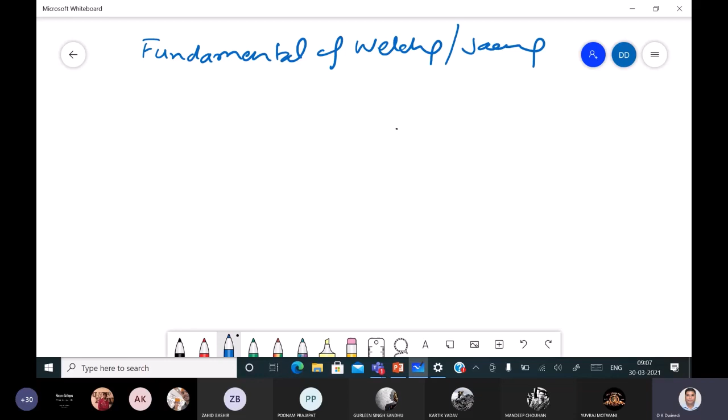Yes sir, okay fine. So what we'll be doing today, we have to primarily talk about the fundamentals of welding, or in general, joining. This can be used for joining of metals or non-metals as well, like plastics or plastic-based composites.

The more interesting or common problems are encountered in joining of metals with non-metals. But very frequently it is required to use both metals and non-metals, and whenever we have to make any usable component, we'll not rely only on one type of metal, but it will be a combination of metal and non-metals.

Due to compatibility issues between metals and non-metals, fusion joining is really difficult. That's why other options of joining are explored.

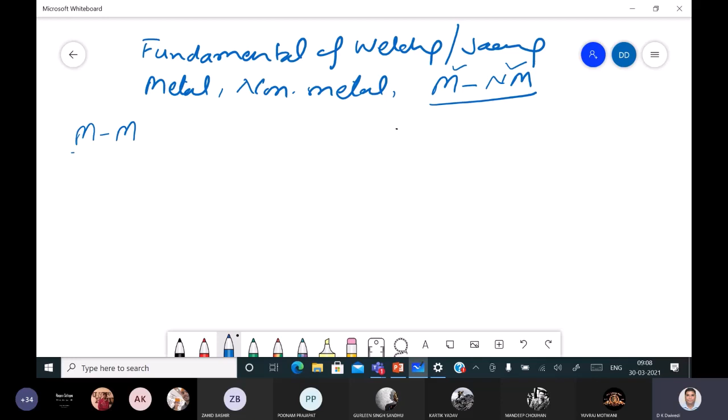So primarily, if we talk of joining metal to metal, what happens? In most conventional cases, if we take two parts made of the same metal A, these can be joined. The best scenario is like the two get joined automatically without doing anything. But this is certainly not workable, because things do not happen automatically. You have to do something.

So the next feasible option is to put some kind of adhesive between the two. In this case, the parent metals A and B are not affected at all and the joint is developed, though the joint is weak. So it may serve some purposes, like just for positioning where no major force is acting.

There is a third, better option. So the first option was not workable. The second is certainly workable, but we get low strength.

Third, better option is where between the two components made of A metal only, we put molten metal of lower strength, like the soldering iron you must have heard of, or the brazing alloy. They have a lower melting point than the parent metal, so that is placed between the components to be joined.

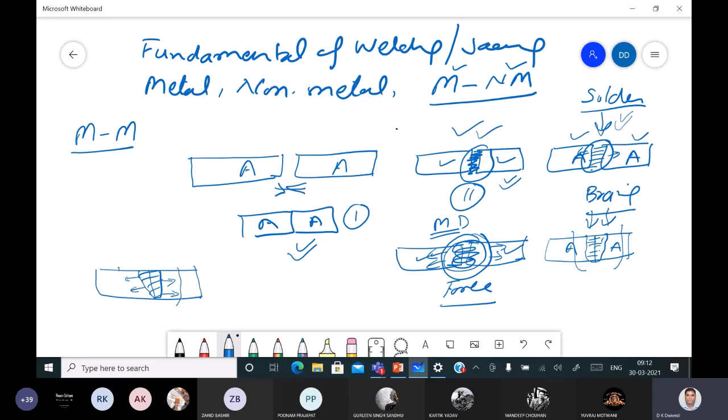So in this process you supply a lot of heat to the underlying thermally conducting base metal. Whenever you supply heat like this and the joint is developed, a lot of heat has been dissipated to the underlying base metal, changing the properties of the material which has been heated, to the zone which has been heated to a high temperature, say above 300 to 400 degrees centigrade for aluminum alloys.

For steel, if it is getting heated above 600 to 700 degrees centigrade, then the properties of the steel will be modified. So basically you are trying to develop the joint through fusion. This is the weld, but next to that the material properties also get modified, forming a zone which will have properties different from the parent material.

Parent material itself, here A and B. I'll give an example. Say A had a yield strength of the base metal of 400 MPa. You may find a situation where the heat affected zone has lost its properties, becoming 300 MPa on both sides. So it will form a weak zone. Similarly, it may become 500 MPa also. So there are both scenarios, both possibilities where you see a change in properties.

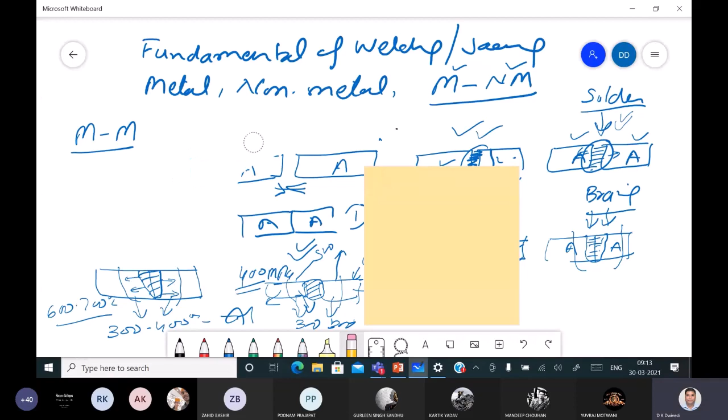And that change may not at all be acceptable. So if that is happening, then what will you do? If the change in base metal properties is taking place, that is by and large unacceptable in case of welding. And if that is the case, then we must do something.

Okay, let's take the base metal. This is the weld joint which has been developed, and this is the zone which has been affected by the heat. So we call it the heat affected zone, HAZ. Both are called heat affected zone.

So this is the weld zone, and next to that we have the heat affected zone where the properties have been modified. These can be modified in very undesirable manners. This can be very strong, this can be very weak. So properties are getting modified, and most of the time this modification is undesirable.

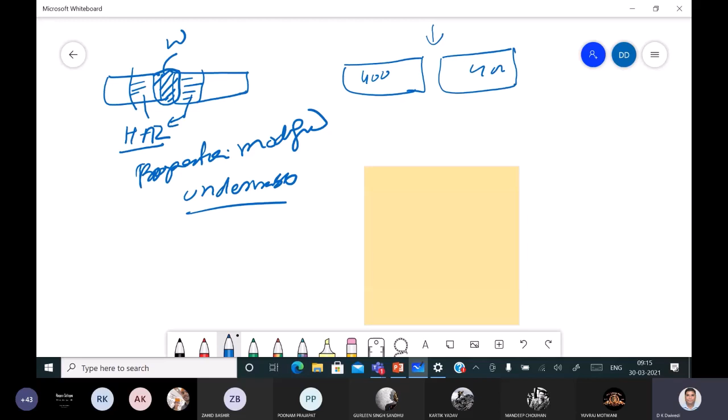So the scenario: the two components to be joined. Here you can use filler of your choice. Base metal had a strength of 400 MPa. You can use filler metal of 300 MPa, or you can use filler metal of 500 MPa. So there is a choice of using a suitable electrode, to get the weld metal of your choice in terms of strength, corrosion resistance, toughness, or whatever properties are needed.

But when you use fusion welding, there is no way to get rid of or avoid this heat affected zone, which experiences changes in properties that are not desirable. So you have good control over the weld, but you don't have any control over the HAZ, because you have already supplied a lot of heat, and due to thermal conductivity, the base metal properties have got modified, and this modification is most of the time undesirable.

So what can we do? We don't have anything in our hand. If you supply less heat, then probably the width of this undesirable zone will get reduced. If you supply very little heat, a very small heat affected zone will be formed on both sides. But this zone will be formed in any case.

So when you supply more heat, there are more problems to the heat affected zone and base metal properties. And when you supply less heat, the problem is less.

So when we supplied minimum heat, when we did nothing, the first case, just bring the two components together. Second case also, there is no application of heat, where we applied just adhesive. In the third case, we supplied little heat in the form of brazing and soldering, where low melting point material was applied. In the fourth case, we applied force for facilitating deformation.

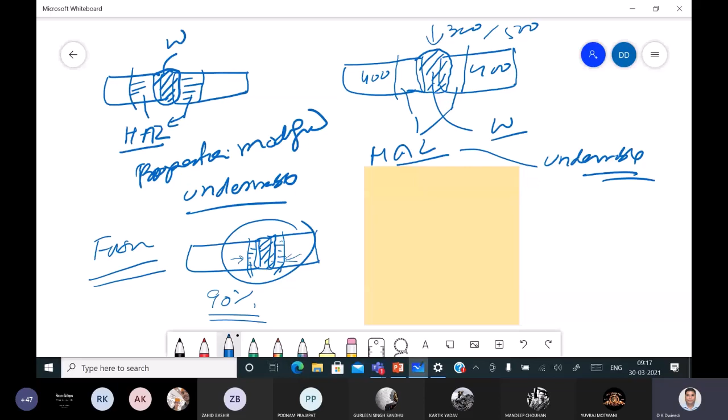More than 90% of welding or joining is performed through fusion welding only. The rest of the joining is really not for structural applications.

So this is that diagram. We get this modified zone on both sides.

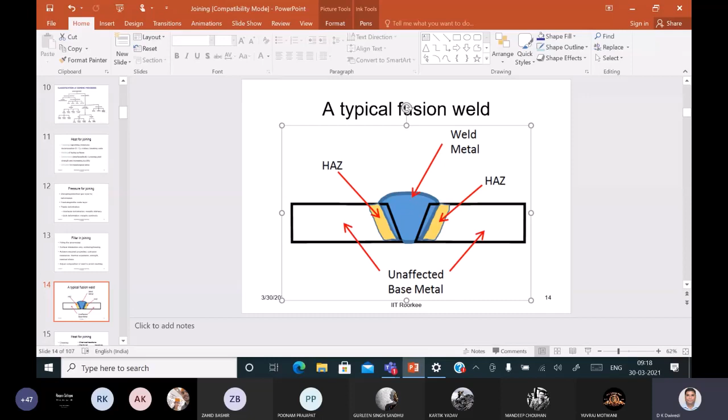Okay, so we get this modified zone on both sides, in the form of the heat affected zone. The weld is of our choice; this we can do as per our convenience. And this is the unaffected zone, the base metal. So the width of this yellow zone can be very wide or it can be very narrow. So what are the things that will be governing the width of this?

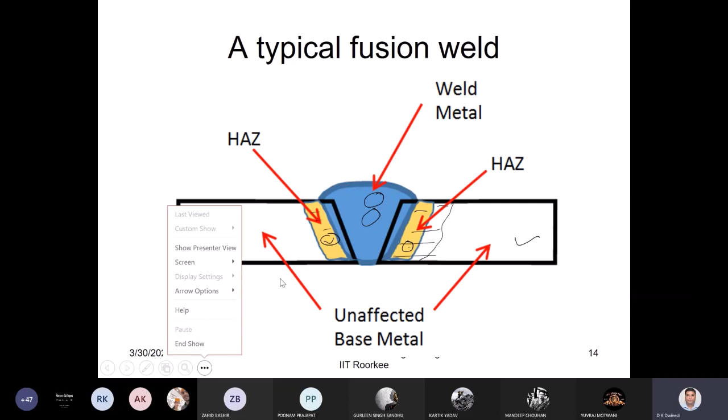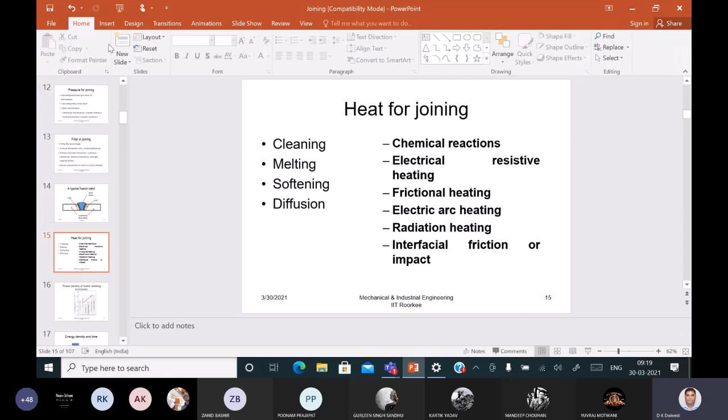So what we can do to control this width of the heat affected zone.

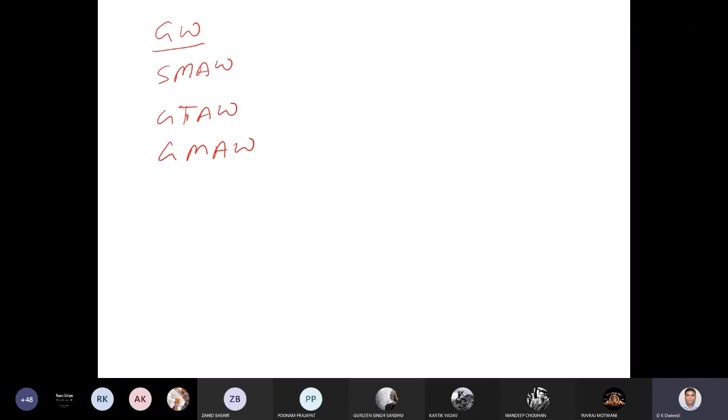Let's see, there are different welding processes, starting with gas welding. Then the very commonly used roadside welding that you see is shielded metal arc welding. The very commonly used for high quality welding is gas tungsten arc welding. Then for industrial applications for high quality weld, gas metal arc welding. Then for very high quality thin sheets, or where very fast and thick sheets are to be welded, there are other processes also, like plasma arc, then laser beam welding, and electron beam welding.

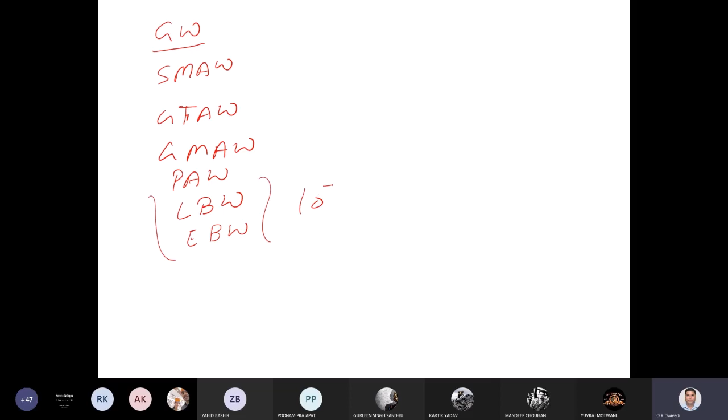If you see the kind of power density they are able to apply, it is 10 to the power 8 watt per mm square, and on the other hand gas welding is just 10 to the power 2, that is 100 watt per mm square, per second. This is the kind of heat it is able to deliver, and the laser beam is able to deliver 10 to the power 8. So these are in increasing order of the power density that they can deliver.

So the higher the power density related to the particular fusion welding process, the lesser the heat you need to supply, because it takes very less time to supply the required amount of heat. Say metal A will require a typical 2 joule per mm cube of heat. Say this is the heat required to bring things to the molten state, which includes both latent and sensible heat. But when you are supplying heat at a low rate, it takes a long time to reach this stage.

But when we use a process where the rate of heat delivery, the power density associated with the process, is very high, in very less time it takes to supply the required heat. And here, at low power density, it takes very long time. Say this is the kind of metal system which is being welded.

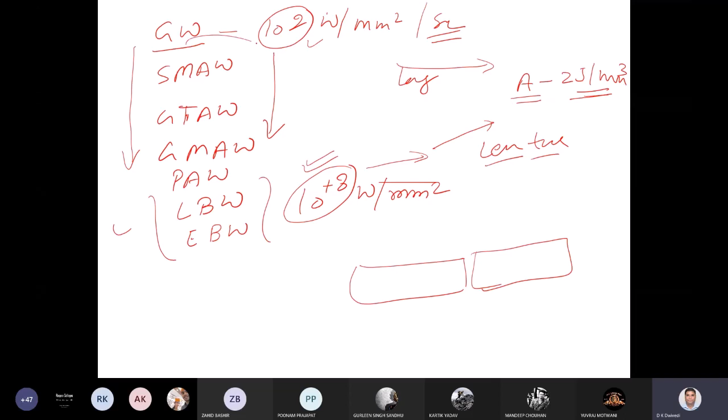So when we use gas welding, it covers a lot of area with the gas flame, and delivers the heat at a very low rate. So you continue to supply heat for 1 minute, 2 minutes just to get the things in molten state. Since the metal is thermal conducting in behavior, it will be dissipating a lot of heat to the underlying base metal, forming a very wide heat affected zone, on both sides.

So the greater the heat affected zone, the greater the compromise with the properties. On the other hand, when we use the laser, in a very short time you are able to deliver a lot of heat, so it comes to the molten state immediately. The heat you need to supply to bring things to the molten state is very less, and heat dissipated to the base metal is also very less. That's why the HAZ is very narrow, or you can say very negligible HAZ is formed. So the compromise with the properties of the base metal is negligible. That is why laser welding or electron beam welding offers a good quality weld compared to gas welding, shielded metal arc welding, or other processes.

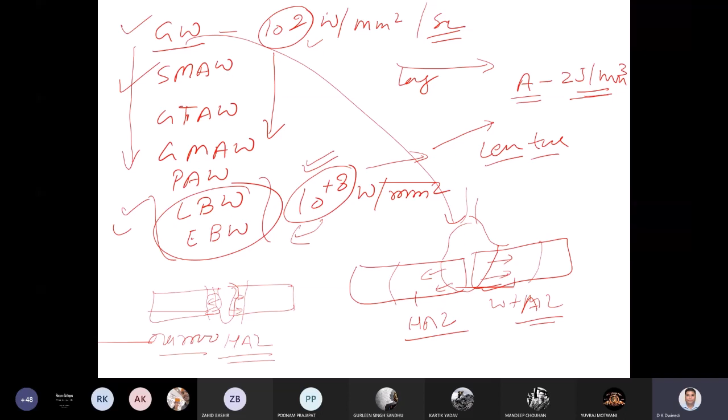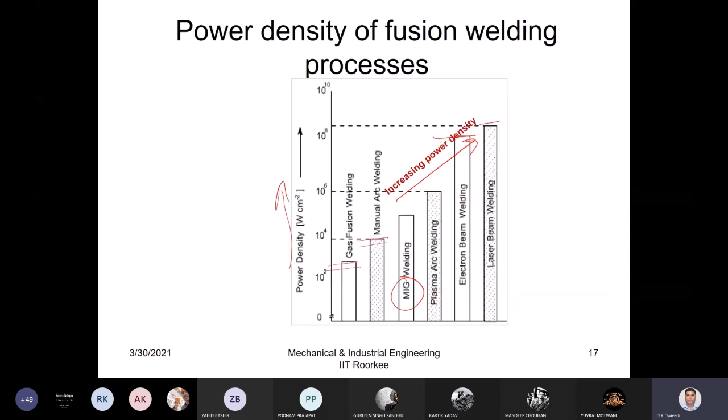So this is what I was saying: the power density associated with different welding processes. Say this is for gas welding, this is for manual metal arc welding or shielded metal arc welding, for GMAW or the MIG process, and this is for plasma. So it is in increasing order. If you see the increasing order of power density, increasing power density means the lesser heat you can supply just to develop the weld of the given metal system. That is what you can see from here.

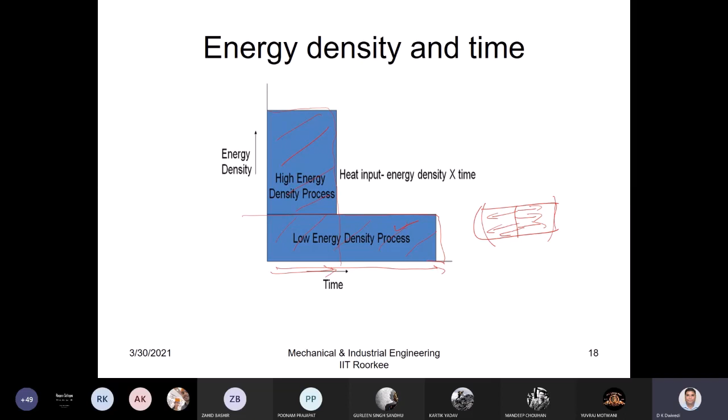On the other hand, when you use the low energy density process to supply the same amount of heat, you need to keep on supplying the heat for a longer time, and in this process the heat will get dissipated to the base metal to a greater distance, forming a large heat affected zone, meaning greater compromise with the properties of the base metal. So low energy density process means greater heat input. You see heat input to the workpiece: gas welding means more heat input to the base metal, so more compromise with the properties, greater damage to the workpiece.

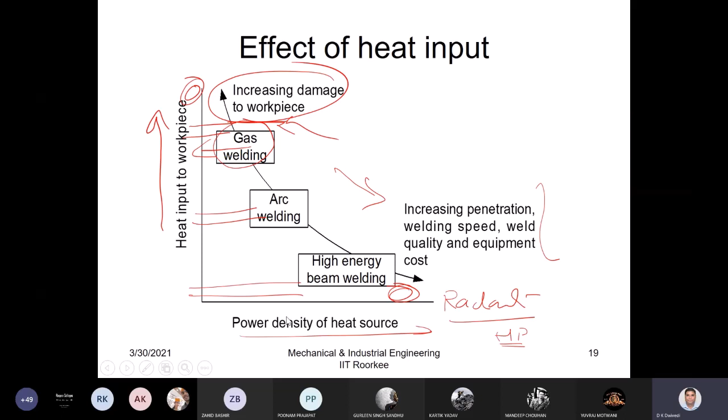On the other hand, when the power density related to the process is very high, like laser beam or electron beam, other abilities are fine, but the thermal damage is less. Increasing thermal damage this side and decreasing thermal damage on this side. So radiation based welding processes like laser and electron beam are high power density processes. Gas welding or arc welding are comparatively low power density welding processes, so they have to supply a lot of heat. For gas welding it's maximum, medium for arc welding, and minimum for laser or electron beam welding. So if you are able to weld with less heat, it's best, because it will not lead to any compromise with the properties. So these are other technological factors, like how heat affects the performance of the weld.

Heat affects the performance of weld primarily in the following ways. Before getting into this, let me use a little explanation.

Say you have supplied a lot of heat, so your weld zone size is very large, and the underlying base metal has also been heated. So heat from the molten metal will be dissipated slowly, meaning the solidification time of the weld metal will be very long, maybe say 1 minute. So every grain will be growing to a larger extent because of the long solidification time. And when your grains are coarse or very large, your mechanical properties are compromised very badly. So this is not good.

On the other hand, when you supply very little heat, the weld zone size is very narrow, very small, and heat is dissipated to the underlying base metal, which is at low temperature, very fast. So the solidification time is less. Less solidification time means cooling rate is very high. That's why you get low solidification time, and that's why the grains are fine. When the grains are fine, the properties are good. So this is a simple relation.

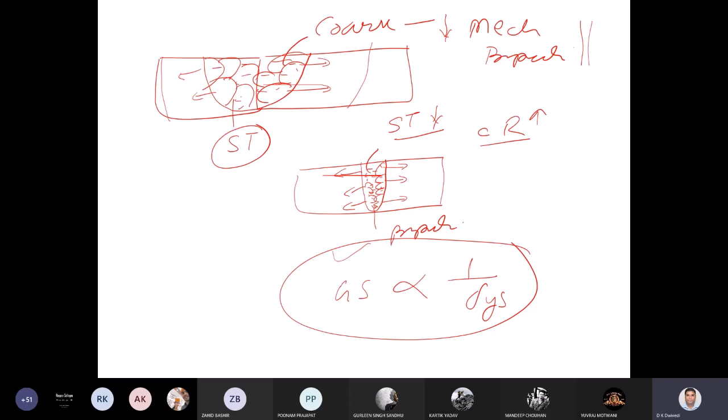The grain size is inversely related to the mechanical properties, primarily the yield strength. So larger the grain size, lower the mechanical properties, lower the yield strength. Finer the grain size, better the yield strength. Yield strength is simple - you must have studied this in the stress-strain diagram. It is the stress level which is desired for ensuring the plastic deformation of the material. Below that, it will be under the elastic deformation condition.

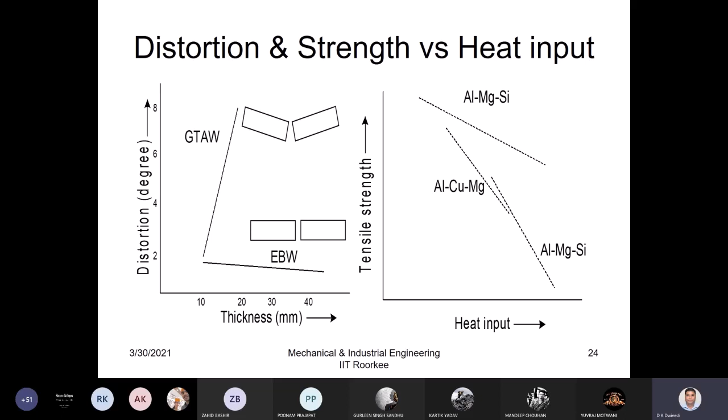So I have already talked about this. There is another aspect. Let me just come out of this PPT kind of thing. Here's another important aspect, apart from the heat affected zone - a very important aspect.

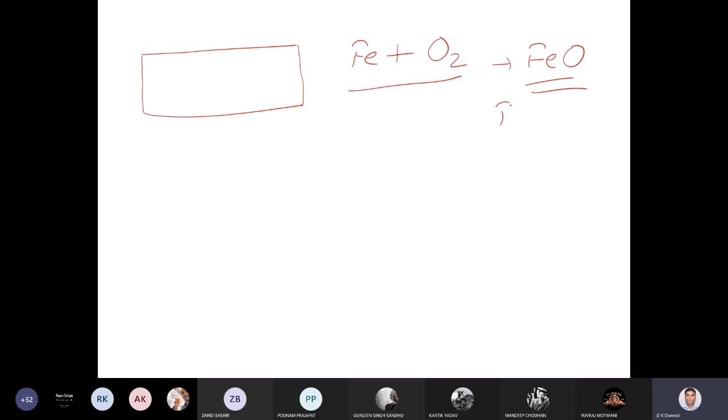When you heat any metal - you must have heard that iron, even in ambient conditions, in the presence of moisture, reacts with oxygen and forms iron oxide. Different types of iron oxides are formed, which appear in the form of rust. This process is slow - it takes long for iron to rust.

But when iron is heated to a high temperature, oxygen reacts very rapidly. If you heat it to 300 degrees centigrade, then 600 degrees centigrade, 900 degrees centigrade, you will see that iron has taken different colors, primarily due to the formation of different types of oxides. In case of iron, these oxides are fine - the iron oxides are not as harmful as others, because all these iron oxides have a melting point lower than the iron itself.

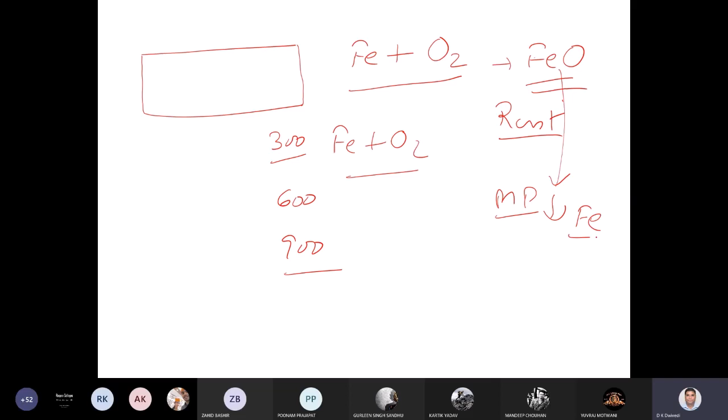Say this is iron, and whatever iron oxides are present at the surface - when you heat it, the iron is heated up to say 1540 degrees centigrade, that's the melting point. So FeO, all types of iron oxides, will melt earlier before that. So iron oxides melt earlier than the parent metal, iron itself. So it's not that problematic, except there is one problem - iron oxide may mix up with the molten metal, so iron oxide particles may be present here and there in the weld. So this is one thing.

Iron oxides are present in the molten metal, in the weld metal, as defects. These are called inclusions. Inclusions are formed primarily due to the reaction of the molten metal with atmospheric gases, such as oxygen leading to iron oxide formation, or nitrogen reacting with the hot metal to form iron nitrides. Both are harmful for the mechanical properties.

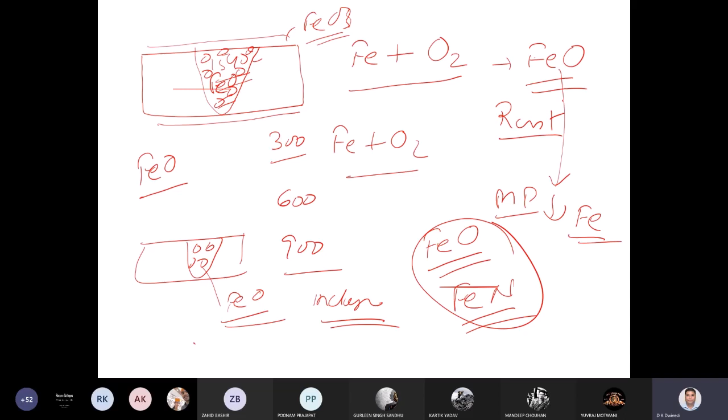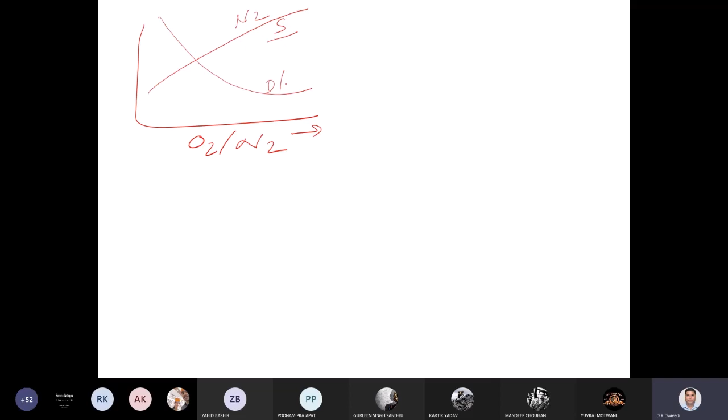If you see the general trend with nitrogen content in the weld metal, the strength increases, but the ductility and toughness come down. So strength goes up while ductility and toughness both come down heavily with nitrogen.

On the other hand, with oxygen content in the weld metal, all properties are affected negatively: strength comes down, ductility comes down, toughness comes down. So everything deteriorates with increased oxygen in the weld metal. Mechanical properties are badly compromised because oxygen and nitrogen in the weld metal form oxides and nitrides, which act as defects, badly compromising the joint properties.

Therefore it is important to understand that the activity of these metals to react with oxygen, nitrogen and hydrogen all increases with increasing temperature. The affinity of the metal to react with other gases simply increases with temperature. Here, we are increasing the temperature of the metal to the molten state, which in case of iron is about 1540 degrees centigrade.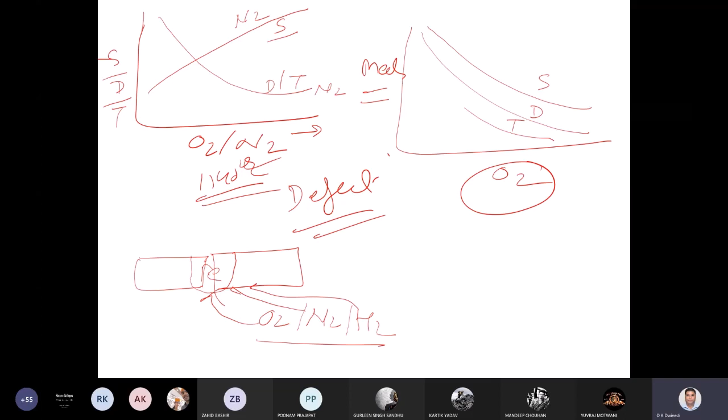When iron is heated to the molten state, it becomes very reactive and shows a strong affinity towards these gases. So whenever iron is in the molten state, it reacts with oxygen, nitrogen, hydrogen, etc., and these gases get dissolved into it.

When these gases get dissolved, it's fine if they remain in gaseous form, leaving gas pockets in the weld that reflect as pores. Oxygen and hydrogen contribute a lot to forming these pores, which leads to loss of metallic continuity and the presence of defects in the form of pores.

This happens because these gases have affinity and get dissolved easily in the molten state, and due to the high solidification rate during welding, they are not able to come out of the molten metal. They get trapped, and when trapped, you find them in the form of pores. So not just the chemical reactions leading to oxides and nitrides, but also gas entrapment leads to the development of pores.

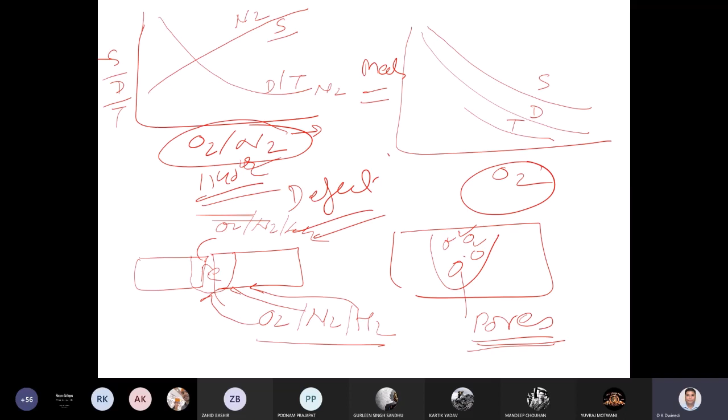These pores and inclusions are harmful for the joint strength and joint properties. So the weld must be protected from these gases, which is why we call it protection of the weld from atmospheric gases during welding.

This is why we need to protect the weld, because oxygen, nitrogen and hydrogen present in the ambient air react with the molten or hot metal, leading to discoloration, porosity formation, and inclusion formation. All of these are undesirable. So what can we do to protect it?

Consider this electrode, simply coated with certain fluxes. When this electrode is coated with fluxes and an arc is struck between it and the base metal, connected through a suitable electrode to the power supply, the circuit is completed. The power supply is connected to the electrode, and another terminal is connected to the base metal to be joined.

So current flows from the electrode to the base metal, and that's how the arc is generated. The temperature of the arc is typically a minimum of 6000 degrees centigrade. It can go as high as 25,000 to 30,000 degrees in the case of plasma arc welding, abbreviated as PA. So the temperature is very high, and any metal can basically be brought to the molten state when such high heat is supplied by the arc to the base metal.

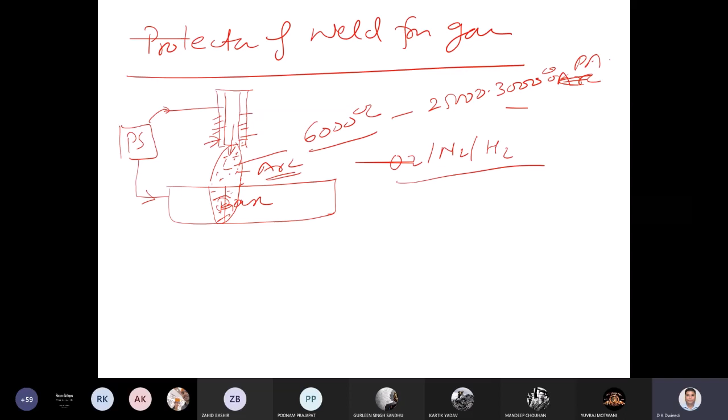So how does the protection come here? The flux which is there with the electrode decomposes with the heat of the arc. So the heat of the arc decomposes the flux with the electrode, and when this decomposition takes place, it forms carbon dioxide, CO2.

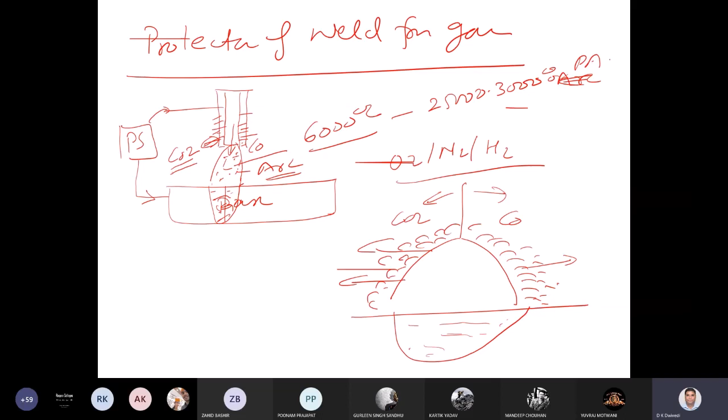So say this is the arc, this is the pool, and the decomposition is taking place, leading to CO2 or CO formation, which forms a blanket or shroud around the arc or the molten weld pool. It pushes the oxygen, nitrogen and atmospheric gases away from the arc zone, forming a cover around the arc and the molten zone. That's how oxygen, nitrogen and hydrogen present in the atmospheric gases are pushed away through this thermal decomposition of the electrode coating, which is mostly in the form of fluxes applied to the electrode to protect the weld pool from atmospheric gases.

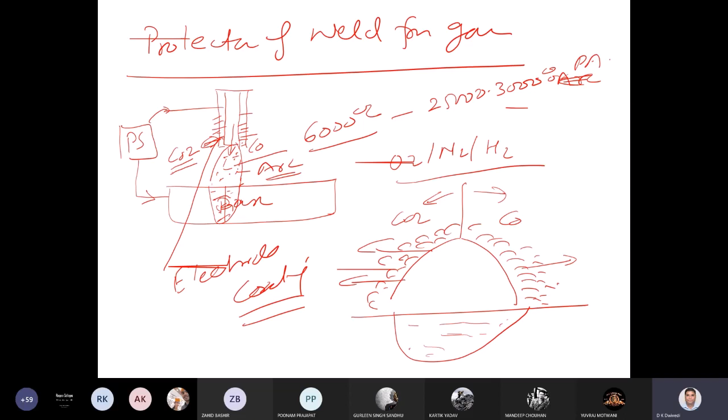This is one way. There is another way to protect the weld pool from atmospheric gases, and that is - around the electrode we have one nozzle. This is the electrode, and this is the nozzle. Through this nozzle we supply inert gases like argon or helium.

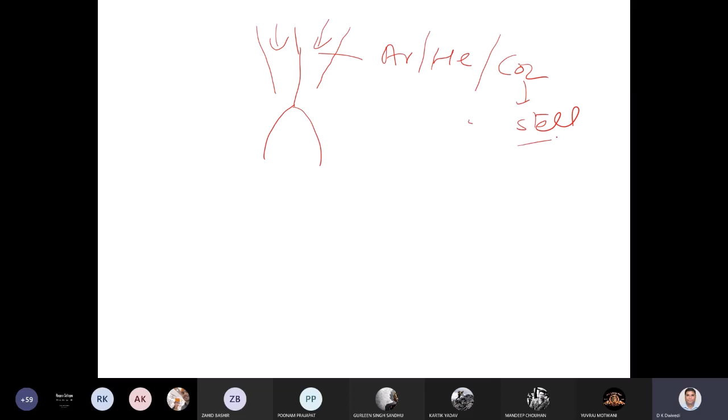We can also supply gases like CO2, inactive gases. This is primarily used for ferrous metals like steels, and inert gases are primarily used for non-ferrous metals or where high quality weld joints need to be prepared, like for steels, aluminium, magnesium, and stainless steel, because they show greater affinity. I'll talk about why inert gases are particularly needed for this.

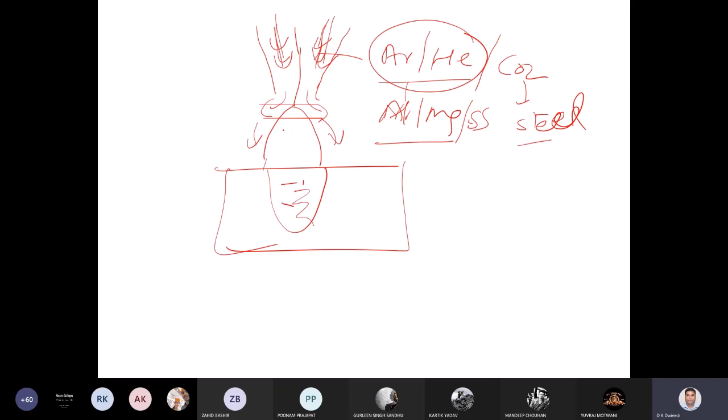So we supply these inert or inactive gases in the form of a jet through the nozzle. When these gases come out of the nozzle, they form a very firm and strong jet around the arc. So this is the pool, this is the arc, and around the arc it forms a very firm shroud of inert gases. Use of inert or inactive gases like CO2, depending upon the metal, helps push atmospheric gases away from the arc zone and the molten metal, and that's how it protects.

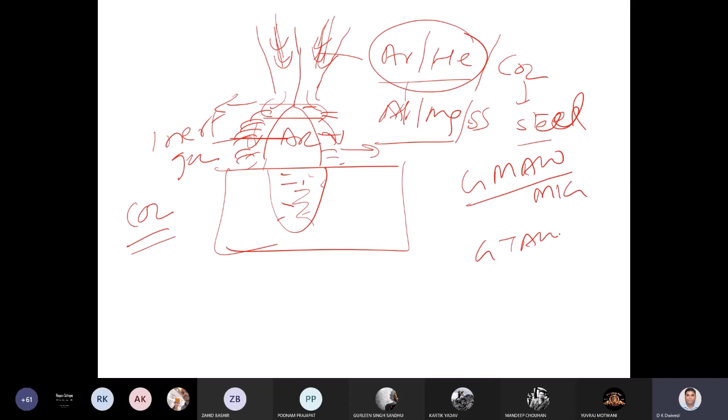This is the second approach. In one case we use electrode coatings; in the second case we supply a jet of inert gases around the arc. This approach is primarily used in gas metal arc welding, also called MIG, and gas tungsten arc welding, also called TIG - tungsten inert gas welding or gas tungsten arc welding process. In both these cases, this inert gas approach is used.

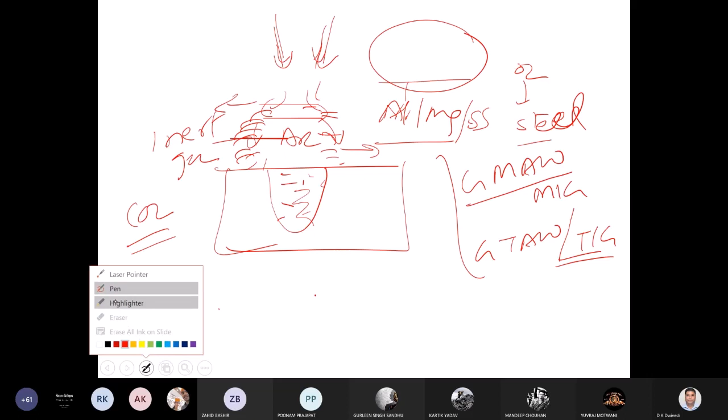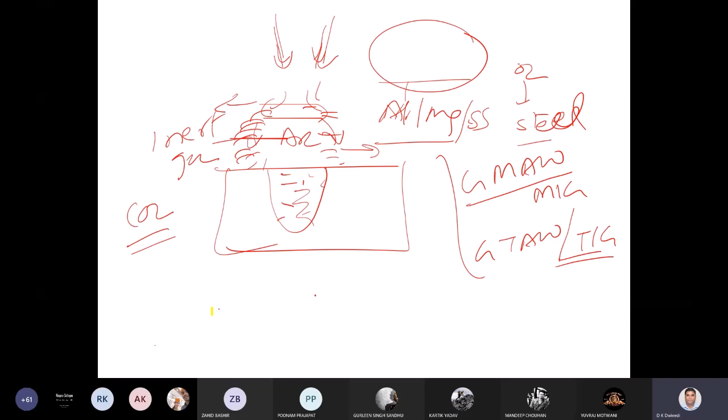There is a third approach of protecting the weld metal, a simpler one. Here, what we do is... let me just end the show and come out with a new one. In that case, we use vacuum.

Vacuum is primarily used because, whether it is laser welding - which is also performed with the help of inert gases like argon or helium - these approaches of protecting the weld pool are not good for the electron beam. Why? I'll let you know.

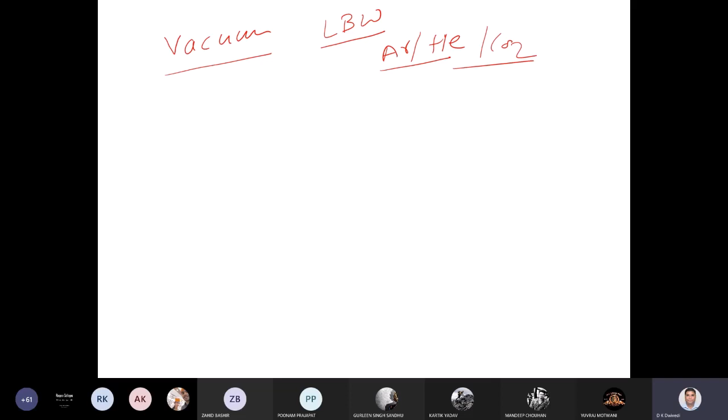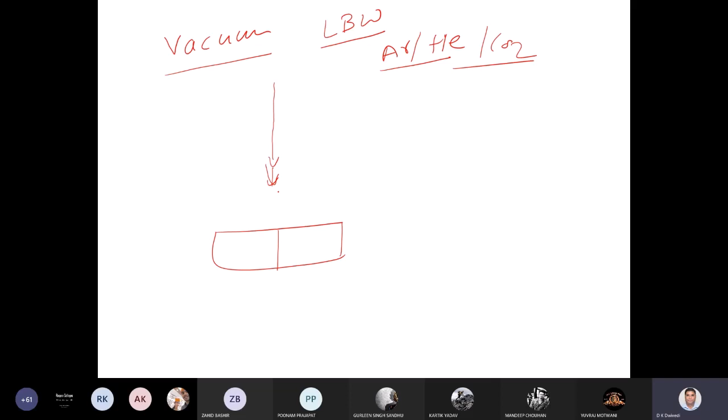In electron beam welding, a jet of electrons is used that strikes the base metal to be joined. If the beam of electrons is directed in the ambient atmosphere, the electrons will collide with the atmospheric gases and their kinetic energy will be reduced, so they will not be able to generate enough heat. Despite providing protection, it will not be able to weld properly.

So what we do basically is enclose the entire assembly to be joined in a vacuum chamber. The components to be joined are placed in the vacuum chamber. Once placed, there is no oxygen and no nitrogen, because all air has been sucked out of the vacuum chamber. Now you direct the electron beam.

So the air has been removed from this vacuum chamber, and the electron beam is directed onto the base metal for melting. Because of the high power density, it melts and produces a very high quality joint, since heat delivery is very low for facilitating the fusion, and vacuum is created so there is no presence of oxygen or nitrogen to dilute or degrade the quality of the weld. This is the third approach of protecting the weld pool.

So you have seen now that weld performance is governed by two things.

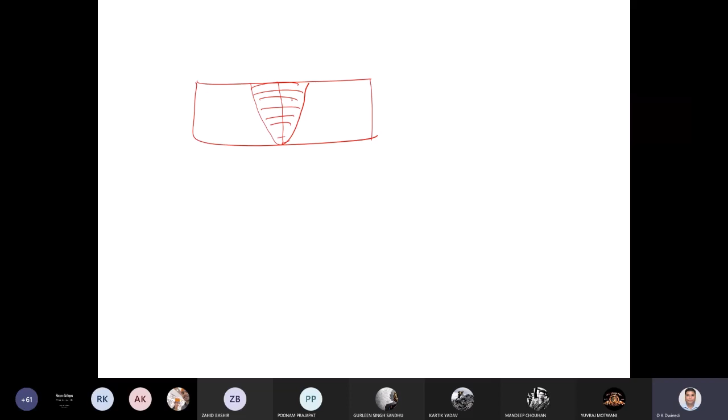One is the soundness of the weld. Soundness means how defective the weld is—if there are oxides, if there are pores. If oxides and pores are present, it means the joint is not clean and has defects. If the weld is properly protected, it will be sound and will not have defects like oxides and pores.

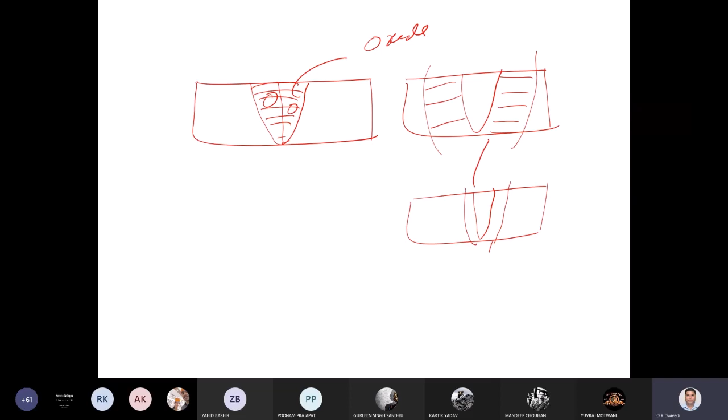The second aspect that governs the performance of the weld joint is the heat affected zone—the size of the HAZ and the extent to which its properties are compromised due to the application of heat. Processes where heat application is low produce a narrow HAZ, and joint performance is much better compared to cases where a lot of heat is supplied and a wide heat affected zone is formed. The wider the heat affected zone, the greater the compromise in properties.

So these are the two main things governing the performance of any joint: reduce the heat input to reduce the HAZ, and protect the weld pool to avoid the undesirable effects of atmospheric gases.

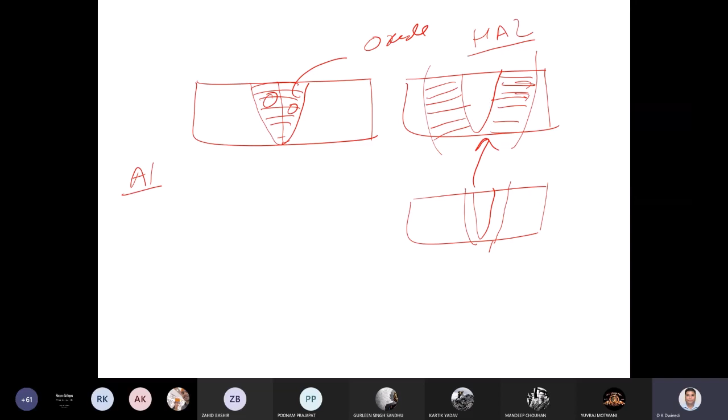Now I'll talk a bit more about why certain metals are more difficult to weld than others. Aluminium is not easy to weld by gas welding—it's not welded that way. Same is true for shielded metal arc welding, where a simple stick electrode with a core wire coated with flux provides shielding through an arc. This approach is also not good for welding aluminium. Same is true for titanium and magnesium—these are not welded easily.

Hello? Saying something?

So why is it more difficult to weld certain metals compared to others, and why do they need more protection? The reason is simple. All these metals, including chromium, which is added significantly in stainless steels, are found difficult to weld. Why? Because whatever oxides they form—like Al2O3, TiO2, MgO, or chromium oxide Cr2O3—all these oxides have melting points much higher than the parent metal itself. For example, aluminium melts at 660, but alumina may melt around 2100.

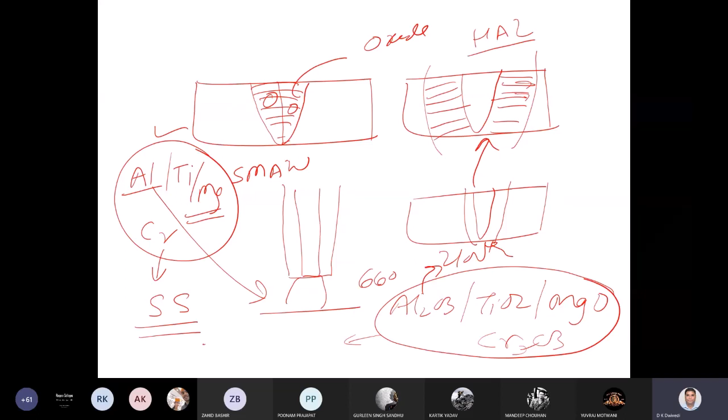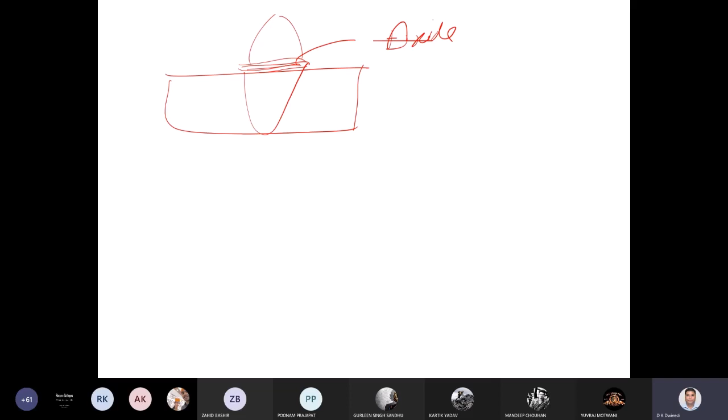Once the oxide is formed, it will not allow the base metal to melt easily. So as you heat the base metal through the arc, alumina or titanium oxide or chromium oxide is being formed, creating a refractory oxide layer that does not melt easily. It will interfere with the melting of the base metal, and since it doesn't melt, it will remain as oxide inclusions.

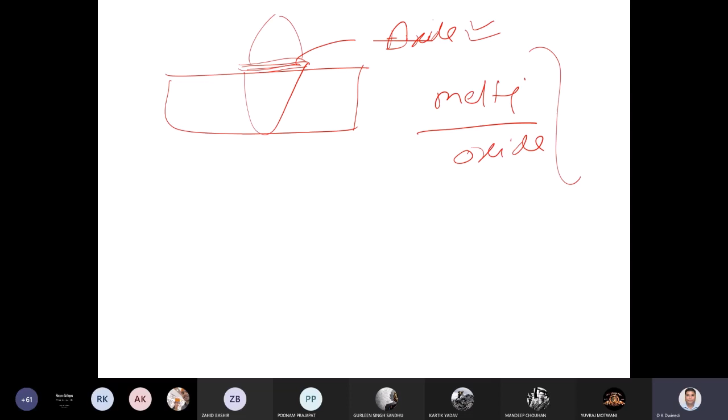So the formation of certain oxides with metals like aluminium, magnesium, chromium (stainless steels), and titanium means they need more effective protection. That is why they are frequently welded with good protection-based welding processes like GTAW (gas tungsten arc welding) or GMAW (gas metal arc welding), rather than shielded metal arc welding, submerged arc welding, or gas welding. This is the main reason: these two processes use argon or helium, which provide very good protection so that these refractory oxides are not formed.

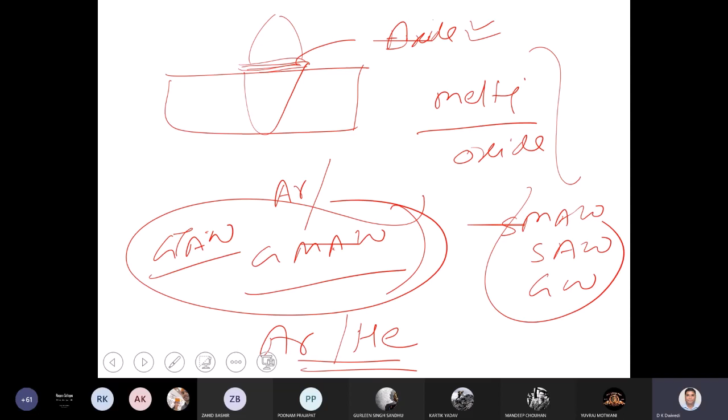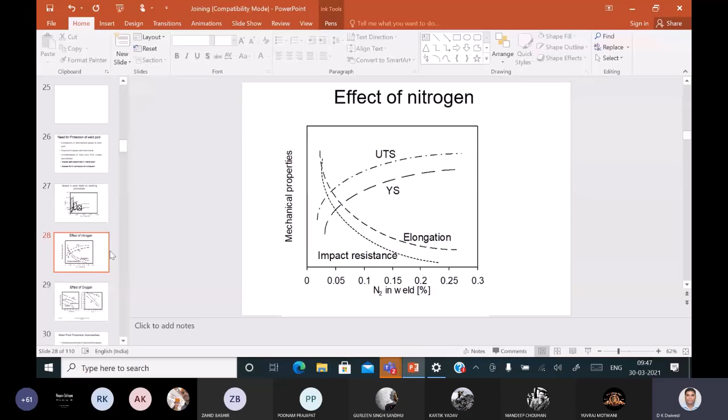This covers the main fundamentals as far as welding is concerned. Once you understand this, the rest of the things will probably be easier for you to get. Now let me talk just about this.

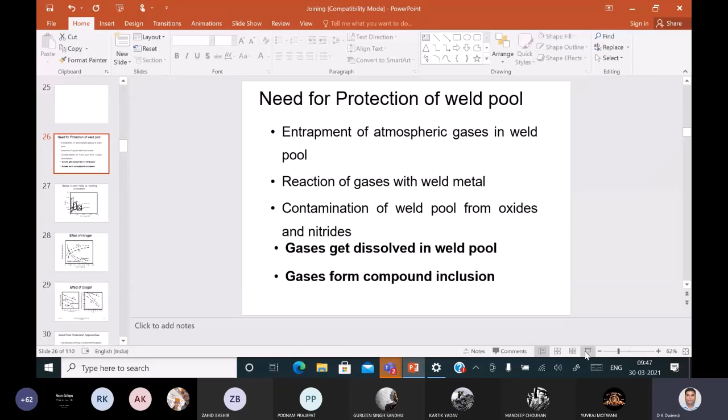As I said, if the protection is not good, what harm can it do? Protection is needed for the weld pool so that entrapment of gases in the weld can be avoided. The gases react with the weld metal, so inclusions can be avoided by preventing the formation of their oxides. Contamination of the weld pool from oxides and nitrides—as I've already said, these gases dissolve and will be present in the form of pores, or they can react to form inclusions like oxides and nitrides.

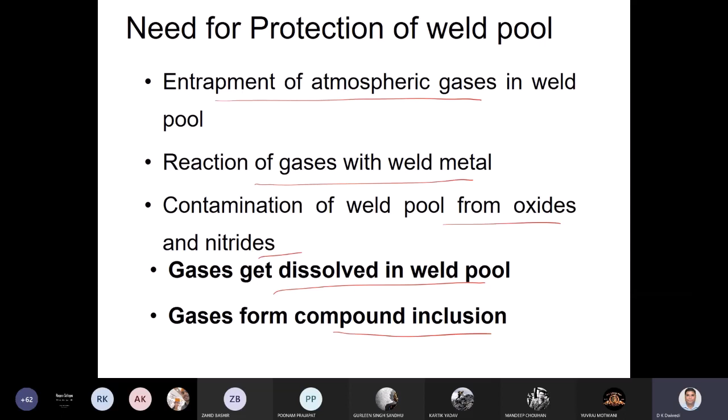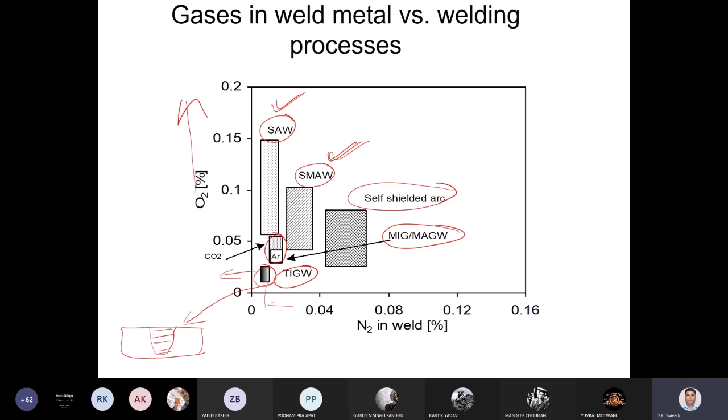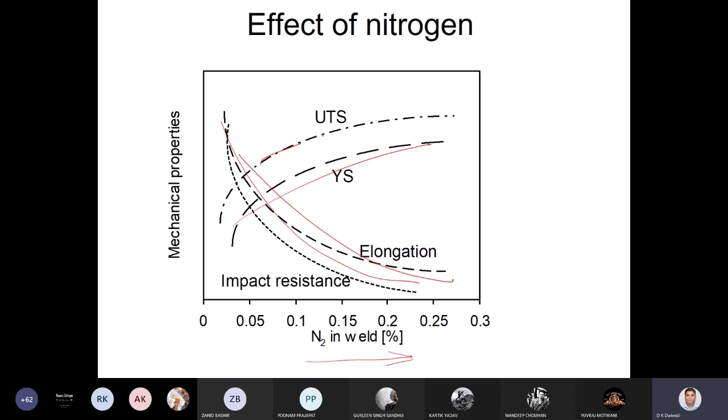As I already said, greater the nitrogen in the weld, more the problems related to toughness and ductility, while strength goes high. Similarly for oxygen, the elongation, toughness, ductility, and yield strength are all affected. Why? This is the answer.

The alloying element concentration in the weld is adversely affected when the oxygen content in the weld is more, because these metals react with the oxygen and the elements go into the form of slag or inclusions. So your alloying element content is basically getting reduced.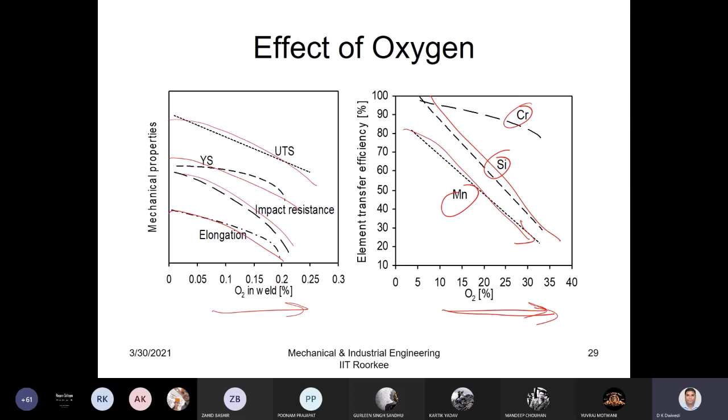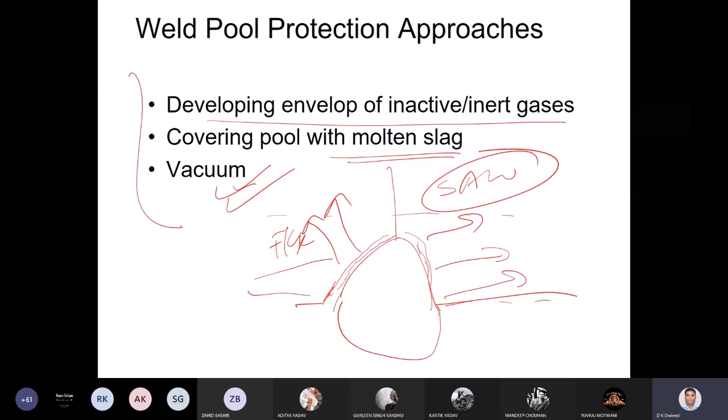The electron beam welding process uses vacuum. How effective it is depends on a number of factors that govern the cleanliness of the weld. That is a different thing which needs greater elaboration.

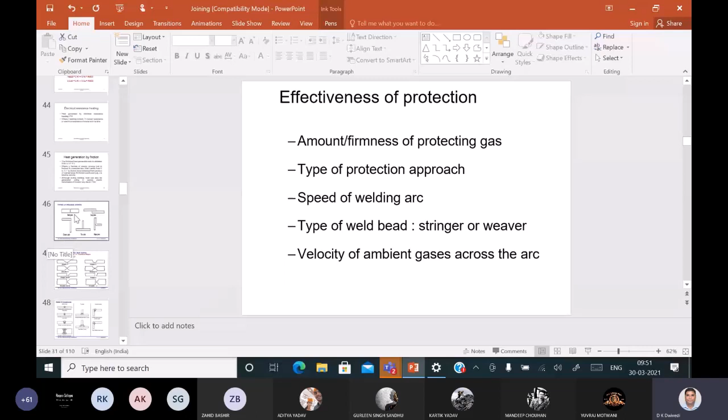So what I have talked about is the important things that govern the joint performance in fusion welding. Fusion welding is the process which is mostly used for developing the joint because it offers very good strength, although there are a number of technicalities related with the development of joints which should be kept in mind so that the desired performance can be realized.